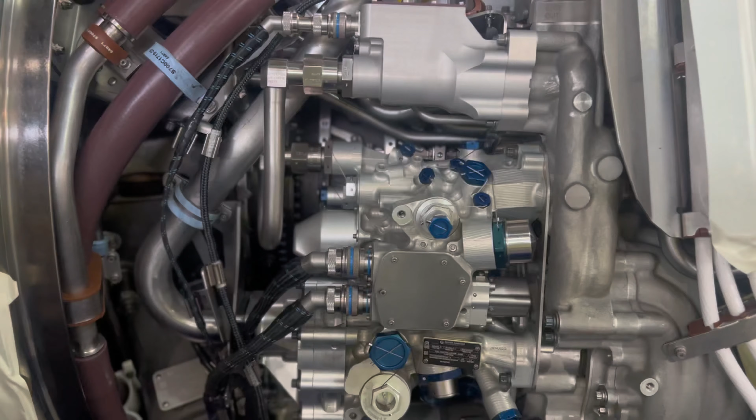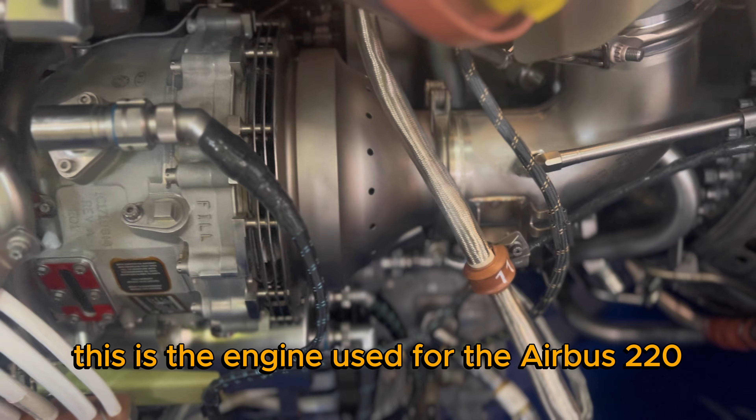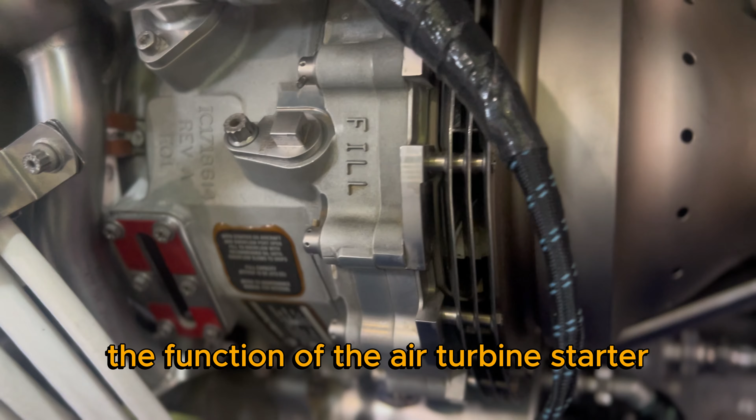In today's video, we are looking at the Pratt and Whitney 1500G engine, the engine used for the Airbus 220. We are going to be learning about a component, the air turbine starter. We will look at its function, some components, and how the air turbine starter works on this engine. So let's get into it.

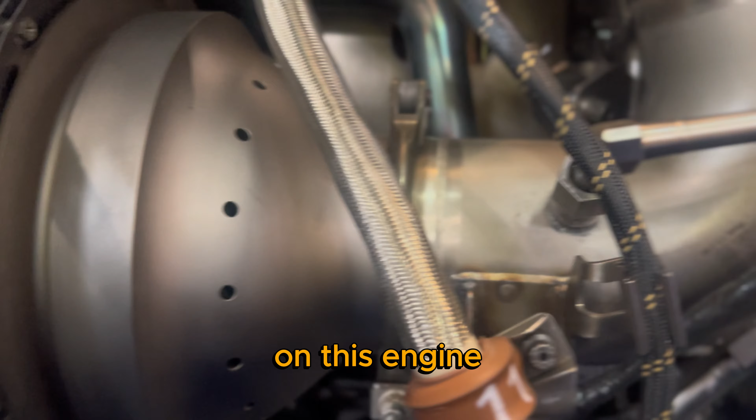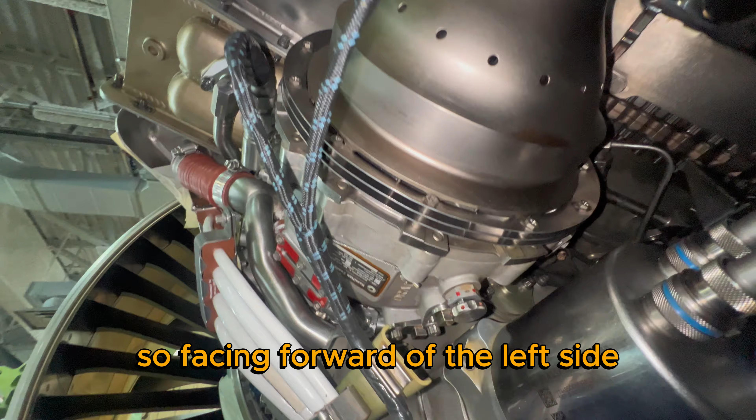Before we learn about how the air turbine starter works on this engine, let's learn about the location of the starter. For this Pratt and Whitney 1500G engine, the starter is located at the left side of each engine. Facing forward on the left engine, the starter is located at the outboard side, and facing forward on the right engine, the starter is located at the inboard side.

Now that we know the location of the starter, let's talk about some components of the air turbine starter. At the top of the starter, we have a dual channel speed sensor, and the whole purpose of the speed sensor is to measure the rotational speed of the turbine inside the starter. It takes the measurement of the rotational speed of the turbine and sends it to the EEC.

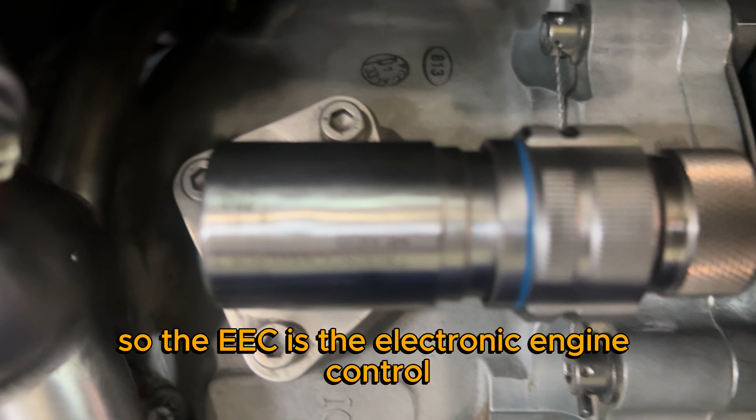The EEC is the electronic engine control. The EEC takes the information to determine the starter valve position and also the starter engagement and disengagement from the gearbox.

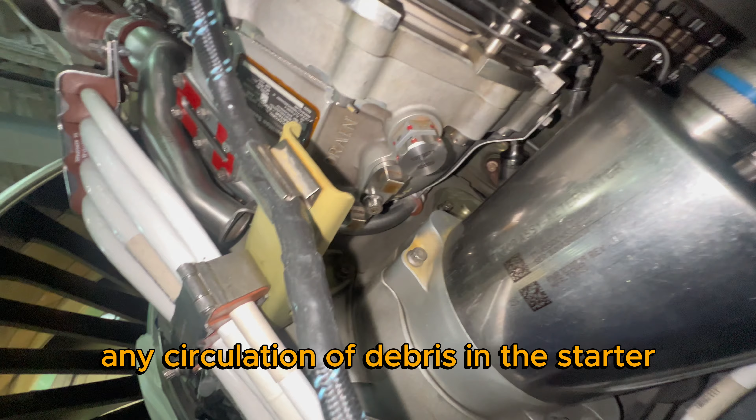At the bottom of the starter, we have the chip collector, the drain port, and also the overfill port. The purpose of the chip collector is to prevent any circulation of debris in the starter. The purpose of the drain port is to drain the oil from the starter, and the purpose of the overfill port is to ensure the right quantity of oil is added to the starter.

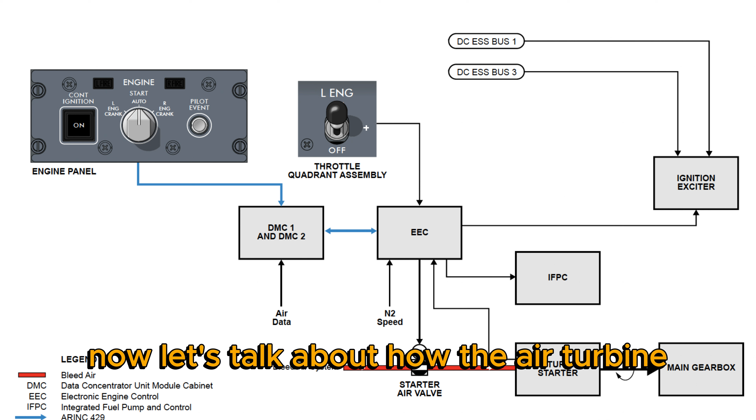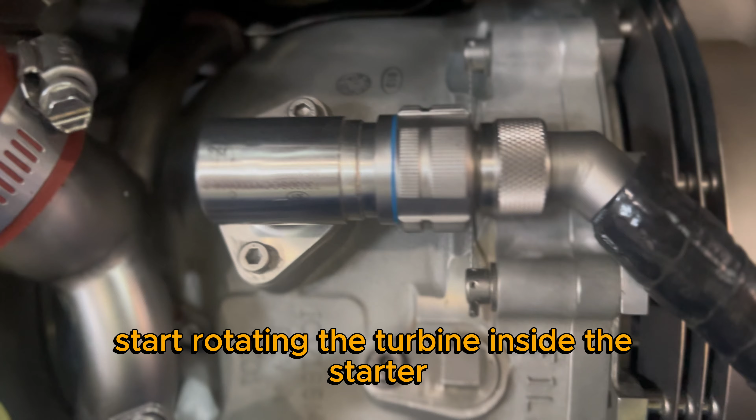Now let's talk about how the air turbine starter works on this engine. Basically, the APU supplies bleed air to the starter, and inside the starter we have a turbine. The supply of bleed air inside the starter starts rotating the turbine inside the starter, and at the end of the starter we have a connecting drive shaft.

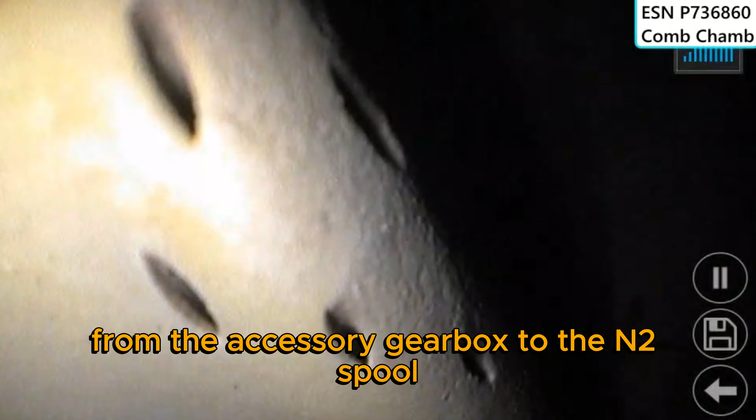The drive shaft is connected from the starter to the gearbox, and the rotational motion of the turbine starts spinning the drive shaft, which starts spinning the accessory gearbox. At the end of the accessory gearbox, we have a connection from the accessory gearbox to the N2 spool, which is the high pressure compressor and the high pressure turbine. The rotational motion of the accessory gearbox starts spinning the N2 spool.

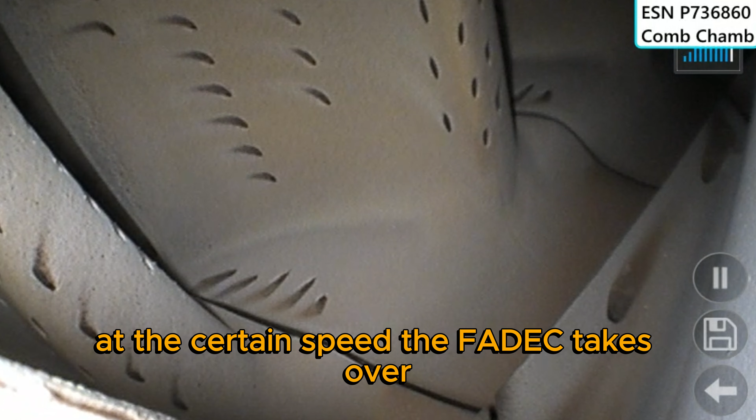At a certain speed, the FADEC takes over. The FADEC initiates fuel flow and ignition. Once there's ignition, the starter automatically disengages from the system. So that's how the air turbine starter works on this engine.

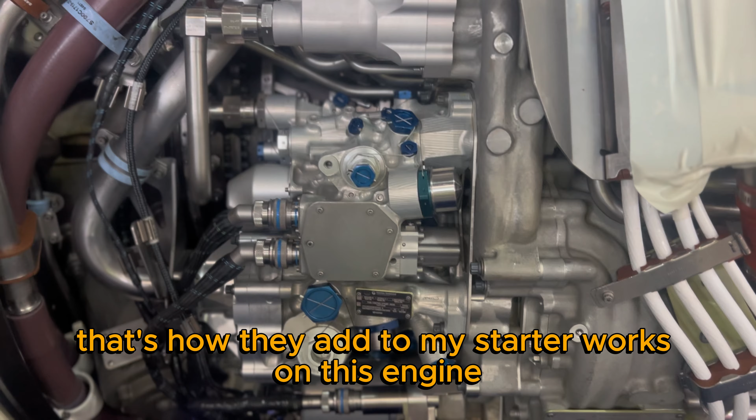Hopefully you guys learned some key components about the air starter on this engine. If you guys have any idea of what type of videos or what component I should talk about next, please drop it in the comment section.